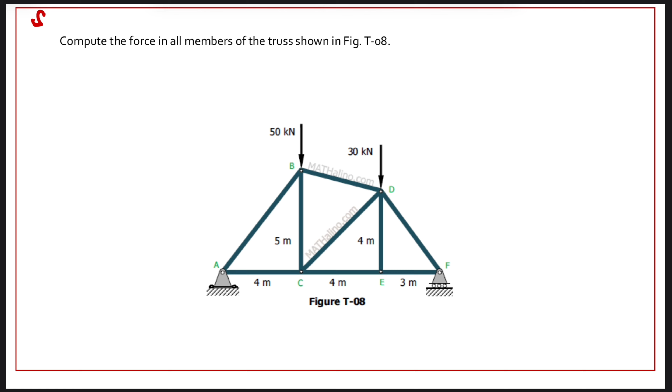Okay, so another example. This is sample problem number 2. Yung mahirap lang dito is nakakapagod siyang gawin, pero yung process niya is mabilis lang. So kaya kaya natin to.

So we have a force in all members of the truss as shown in the figure. Meron tayong roller tsaka pin, tapos 50, tapos 30 point load. Meron din tayong 5 meters na height, 4 meters.

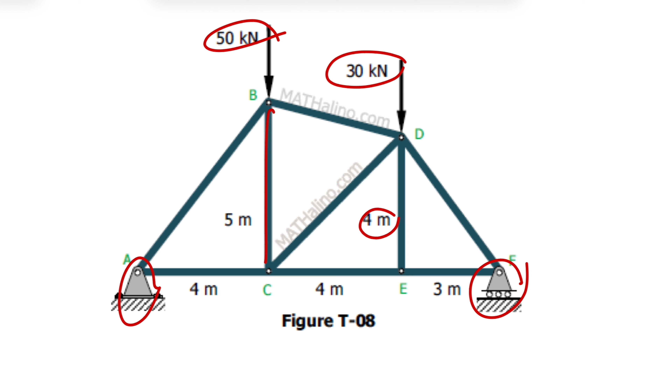Syempre, pwede na natin kunin yung mga hypotenuse nito. So, this one is magiging 4 plus 5, ito 3. Square root of 4 squared plus 5 squared. Hindi, 41 pala. This one is 41, square root.

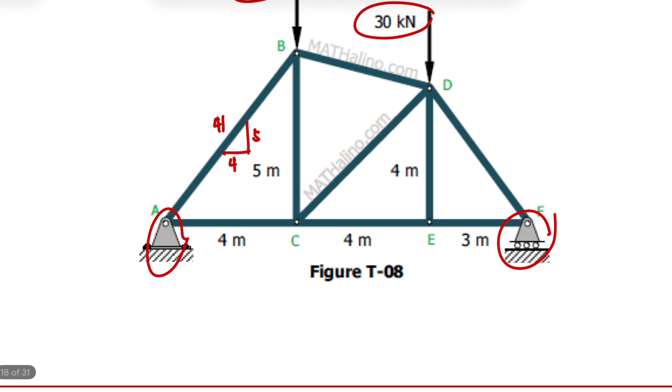Tapos, ito naman 3, ito naman yung 5. Ito, 4 and 4, 4 square root of 2. Tapos ito naman, ito kasi 4, ito naman 5 minus 4, so this is 1. So kaya 4, 1, meron tayong square root of 17.

Wala lang, nilagay ko lang kasi kailangan natin yan later.

So, this one is the roller tsaka pin. Yung reactions natin dito is pwede natin ma-solve AY. Solve natin yung reaction, summation moment at A. Meron tayong Fy, yung moment arm natin is 3 plus 4 plus 4, so magiging po itong 11.

And then, meron tayong downward or clockwise na 50, tapos 4, and then 30 minus 30 times 8, equivalent to 0. So, yung Fy natin is meron tayong 50 times 4 plus 30 times 8 divided by 11, equals 40.

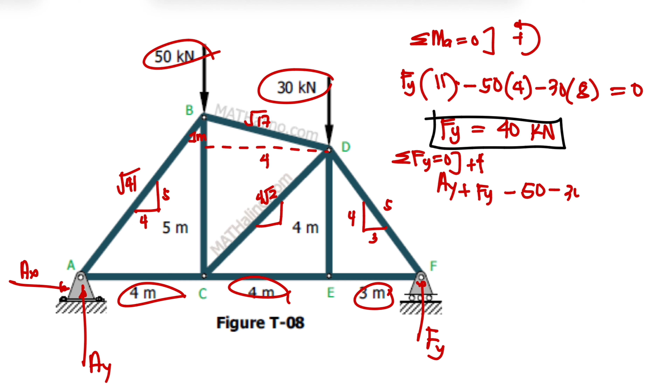So sa AY, summation forces Y, meron tayong Fy minus 50 minus 30. Yung Fy natin is 40, ibig sabihin yung AY natin is 40 din.

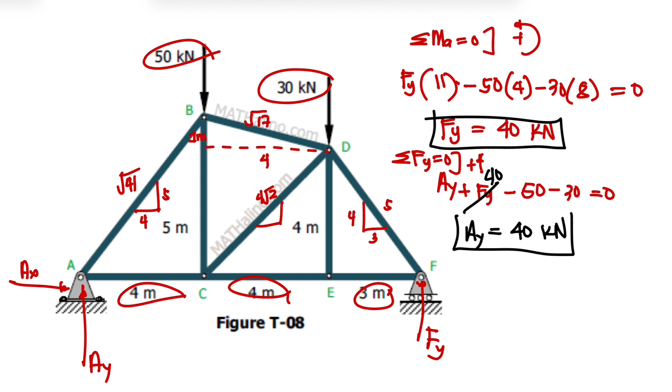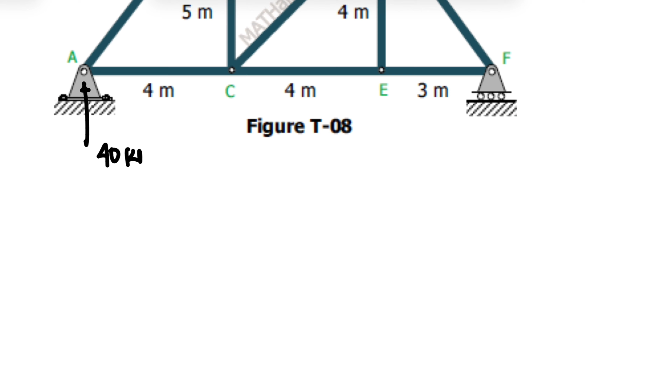Yung AX is equivalent to 0, hindi natin siya include. Okay, solve natin, meron tayong 40, parehas upward, no? And 40.

Para na tayong step number 1. Step number 2 is to choose a joint na meron dalawang unknowns. Siyempre, pili tayo dito sa dalawang support. Kahit alin dyan yung kunin nyo, makakasolve kayo ng dalawang unknowns. Unahin natin itong A.

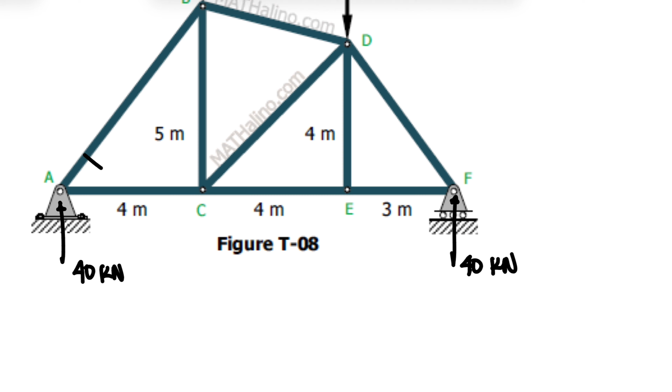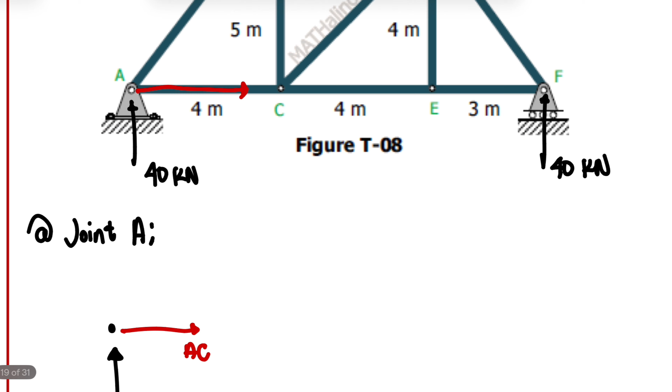At joint A, draw the joint A. Meron tayong 40. Tapos, unknown natin is itong AC, in tension.

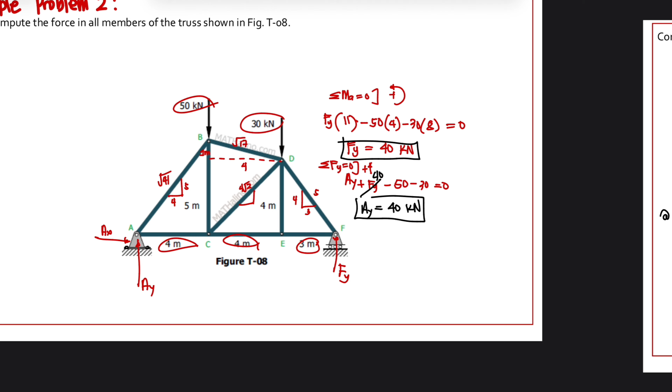Tapos, yan, AB diagonal. I-drawing natin yung triangle: 5, 4, tsaka square root of 41. 4, 5, square root of 41. So, in this way, malalagay natin yung ABY and ABX. AB, 5 over square root of 41. Wherein yung ABX is AB, 4 over square root of 41.

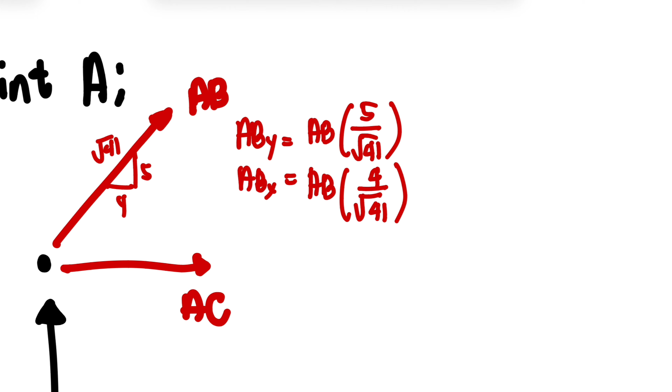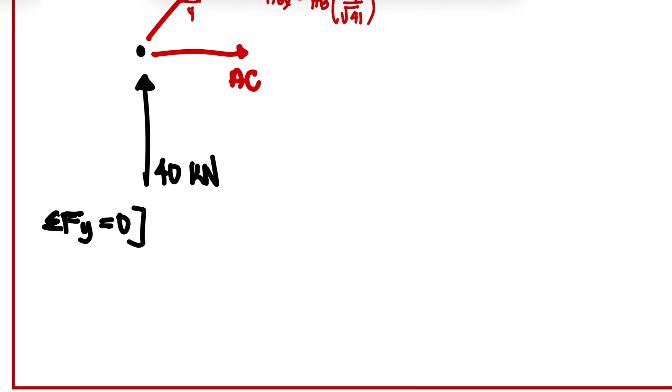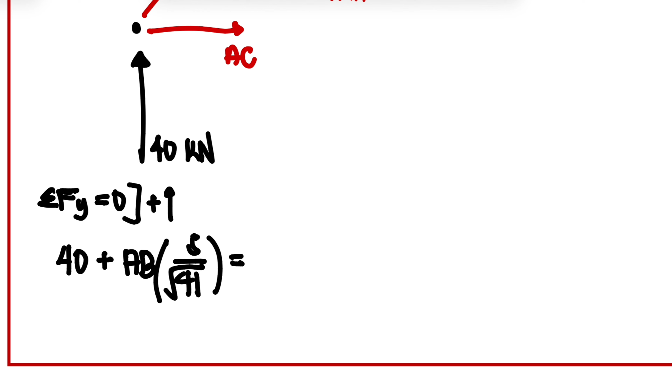So, summation forces Y. Kapag ganito, meron tayong 40, tsaka AB. So, kaya ang mangyayari, 40 kasi is upward, plus ABY, wherein yung ABY is 5 over square root of 41. This is equivalent to 0. Kung ma-observe natin yung AB natin is magiging negative.

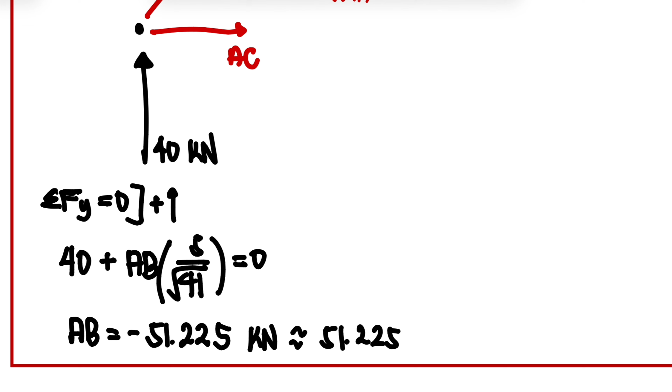51.225, or this is 51.225 kilonewton, compression, C.

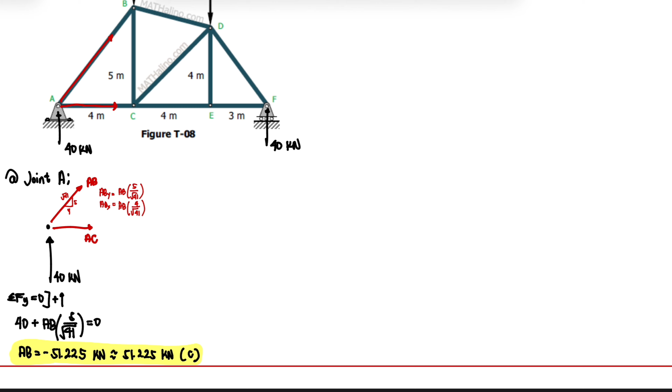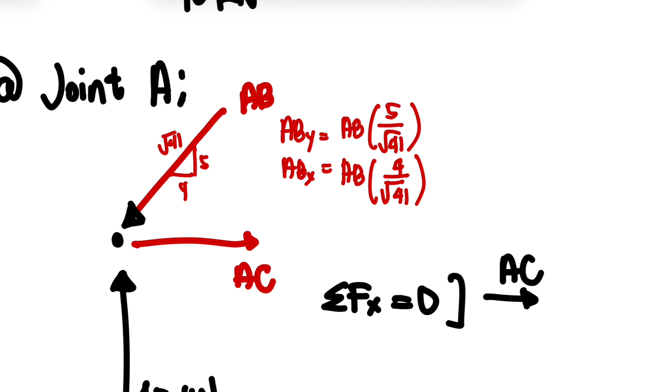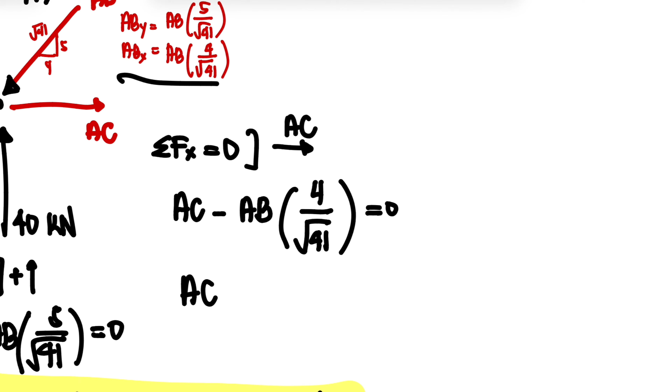Meron tayong 32. This is in tension.

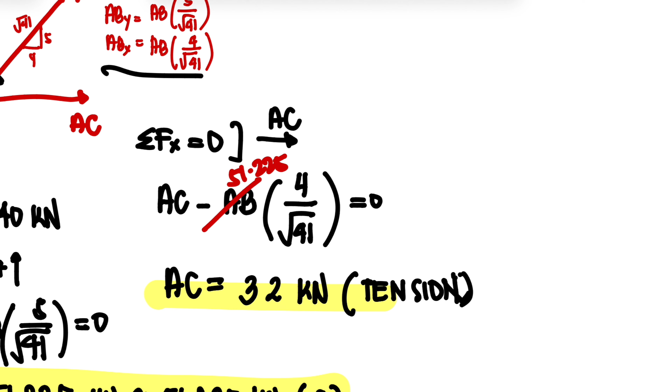Okay, so next joint, ano tayo? Pwede tayo mag-joint A, pwede naman tayo mag-joint C. Ay, joint B o kaya joint C. Kapag joint C, 1, 2, 3 - tatlo. Kapag naman joint B, 1, 2. So, joint B tayo.

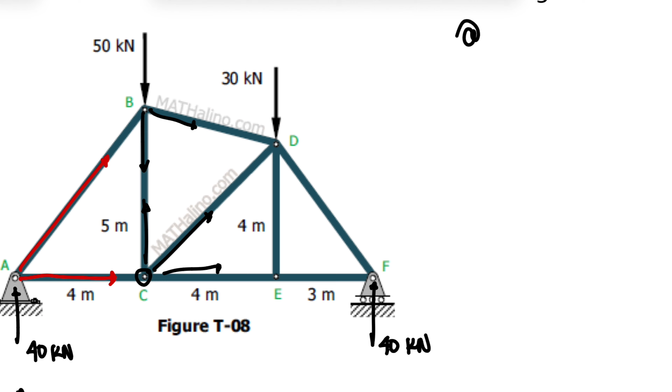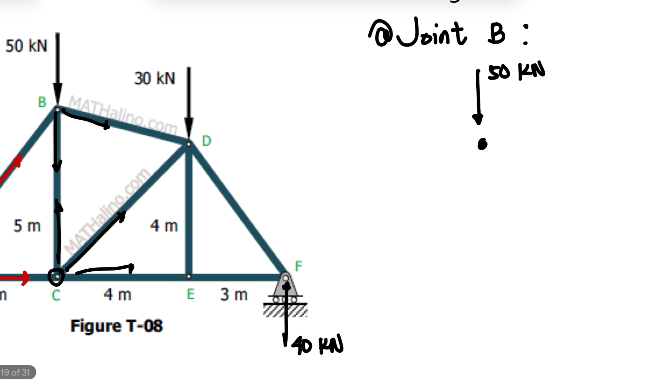So, joint B, meron tayong downward na 50. Yung AB natin is in compression, kaya papunta po siya doon sa point.

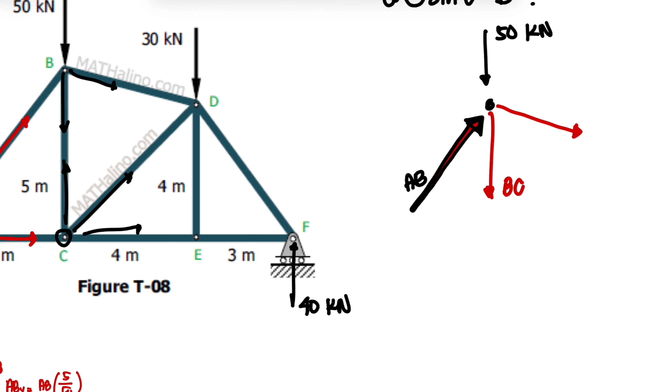Next, BC. Tapos, slant naman ulit, BD. Masyadong marami ng slant, pero drawing natin dito sa BD. Meron tayong BDX and then BDY.

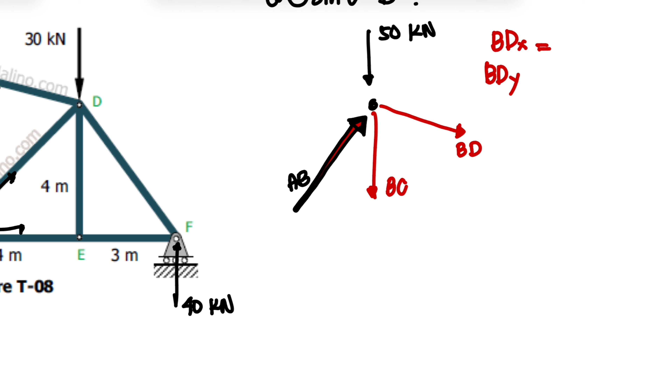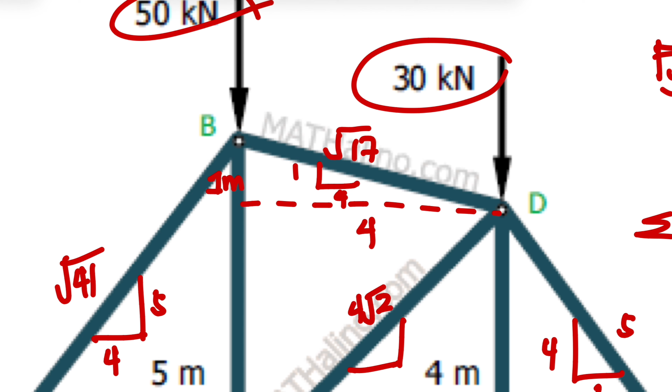Kapag BDX, meron tayong ito: 4, tsaka 1, 17, square root of 17. Yung x, 4 over square root of 17. Bali, yung BDY naman is 1 over square root of 17.

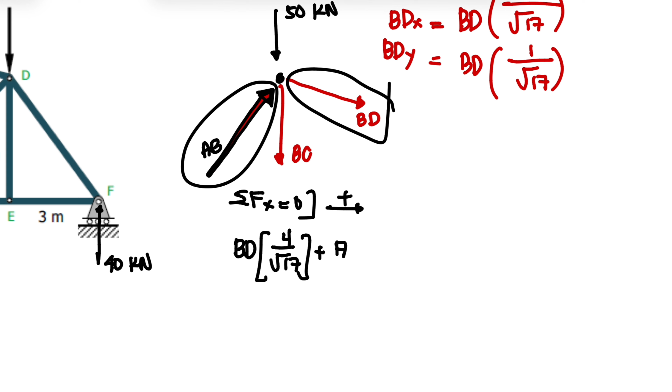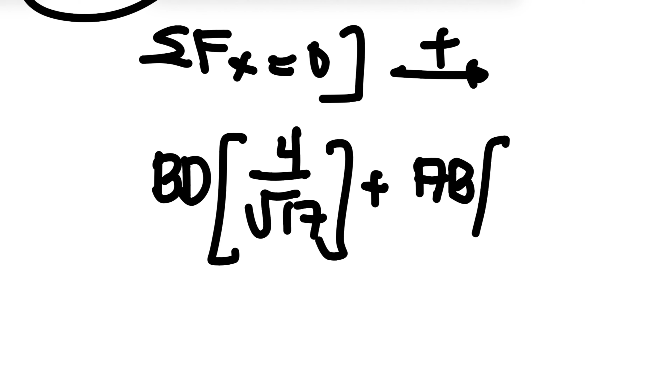So, again, solve natin summation forces horizontal, x equivalent to 0, to the right positive. So, yung horizontal lang natin is itong AB, tsaka BD. Kaya, magiging siyang BD, X, 4 over square root of 17, plus AB. Pero yung AB, meron din yung diagonal, no? Kasi ito yan, no? AB, X, 4 over square root of 41. This is equivalent to 0.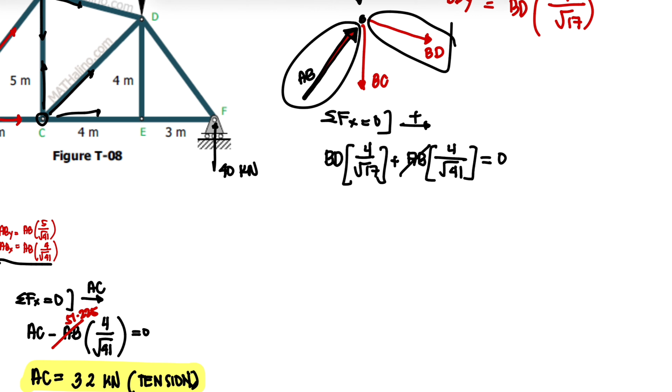Pero meron na tayong value ng AB na equivalent siya sa 52... ilalagay ko na dito, no? 51.225.

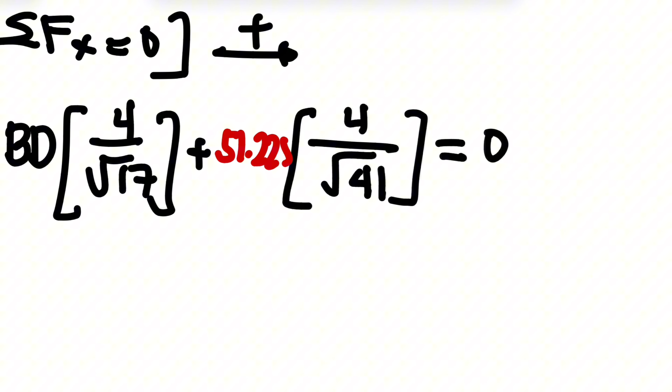So, using this equation, makasolve tayo ng BD, that is equivalent to square root of 41 times square root of 17 divided by... 32.985 kilonewton.

So, this is square root of 17 divided by 4. This is negative, so this is compression. Alisin ko na lang yung negative, no? Okay, kailangan panoorin nyo itong video.

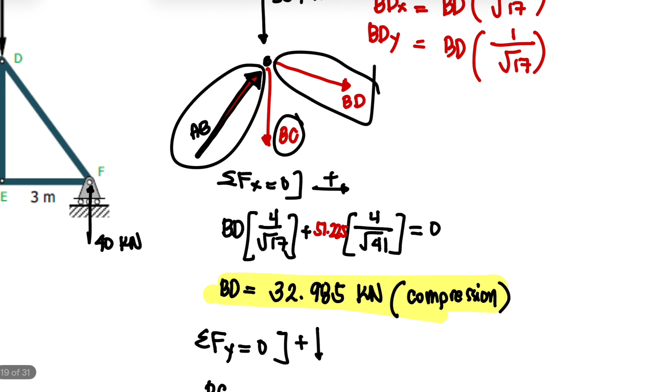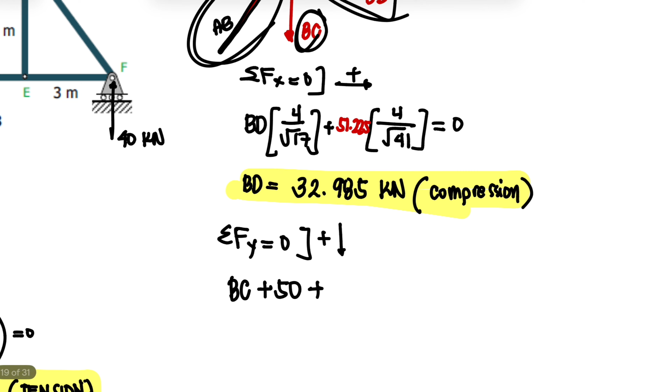Tapos, summation forces Y naman tayo. Yung Y natin is, meron tayong BC na downward, lagyan na lang natin as downward din. So, meron tayong BC downward, bali magiging 4 yung ilalagay natin: AB, BD, BC, 50. Yung 50 is downward din, so positive. Yung BD is downward din.

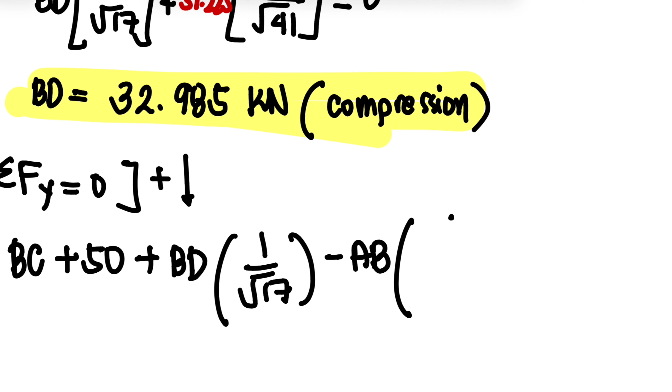So, BD pero y, kaya 1 over square root of 17. Yung AB naman is minus 5 over square root of 41, equivalent to 0. So, from this, meron na tong mga value.

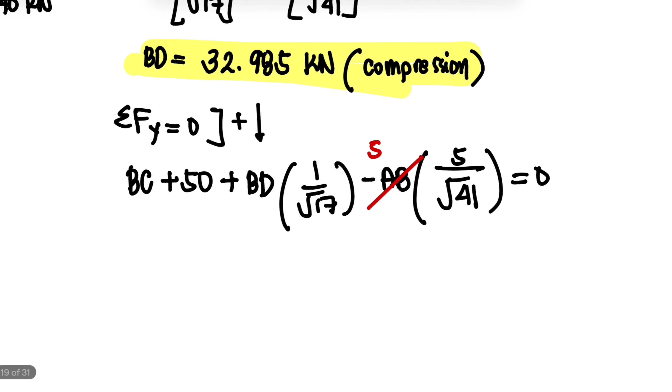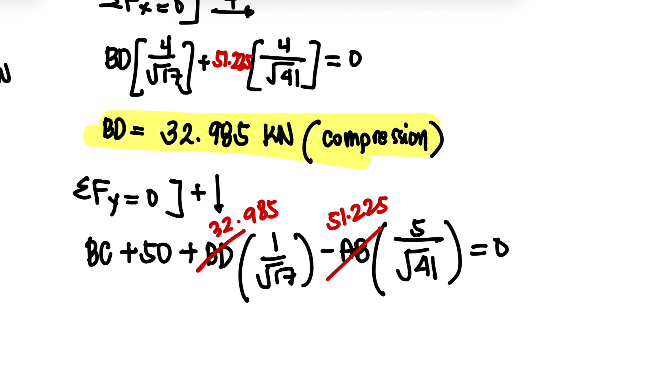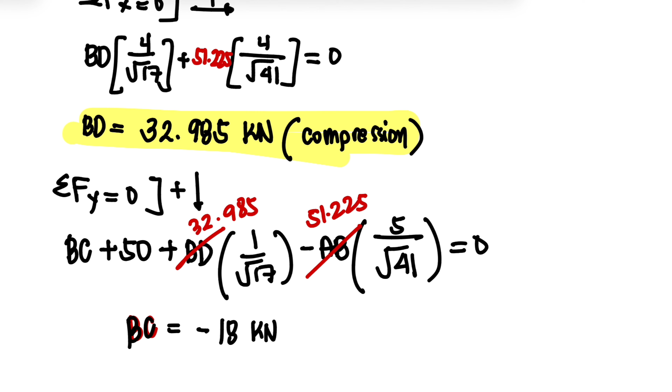51.225, wherein yung BD naman is 32.985. Kaya, ang mangyayari, we have 5 over square root of 41 minus 32.985 times 1 over square root of 17, minus 50. Yung BC is magiging negative 18 kilonewton. Since this is negative, i-rewrite na lang natin siya, kasi this one is in compression, BC.

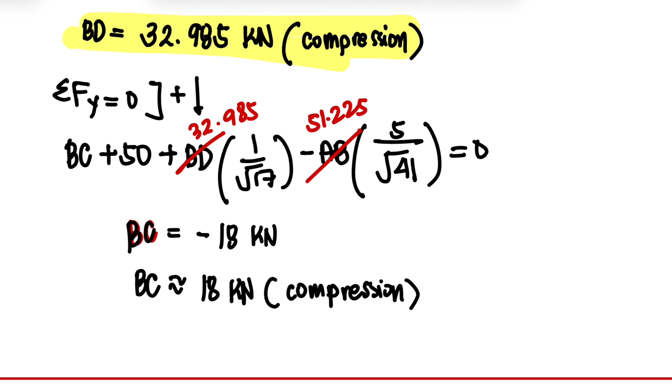Okay, now we can continue solving for the force. So, we can proceed with joint C.

Since we have the value of BC, our unknowns are CD and CE, since we also have AC already. Let's circle that. So, at joint C, let's draw the joint.

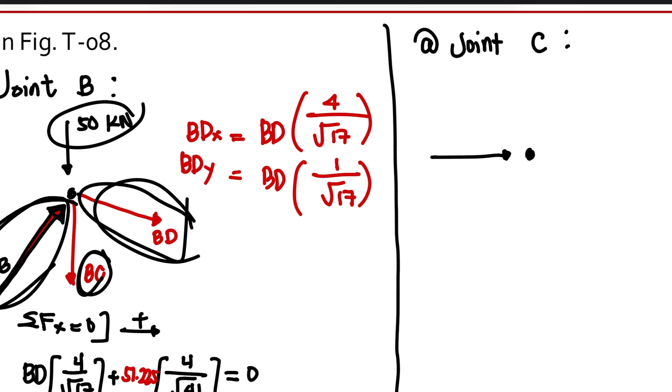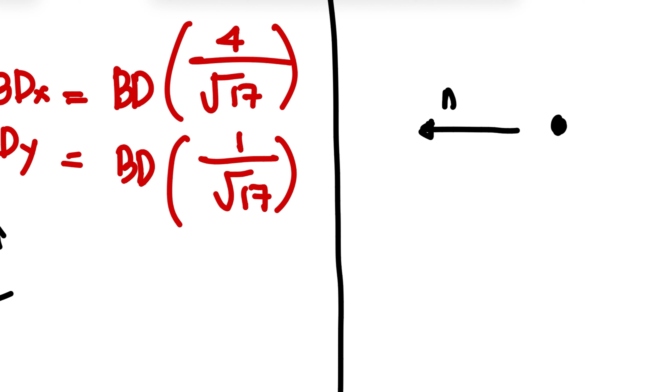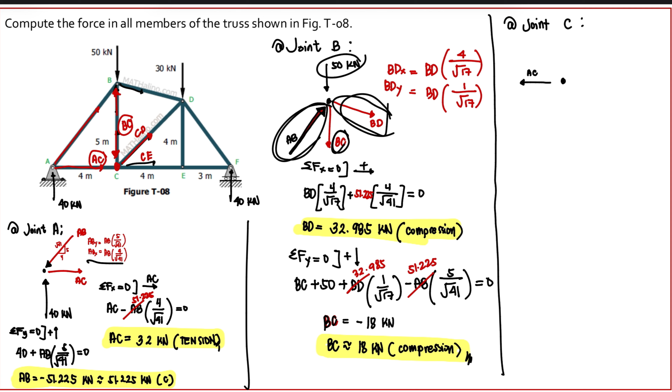This is joint C. We have AC, wherein our AC that we solved is in tension. Aside from AC, we also have upward. Our BC is in compression, so this changes. In joint B it's like this, but when we look at joint C, it goes inward. I hope that's understood.

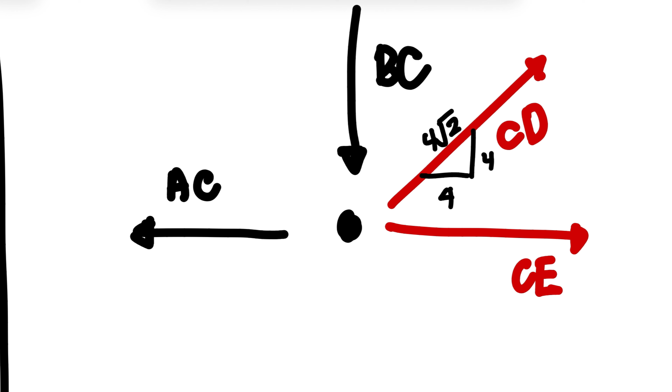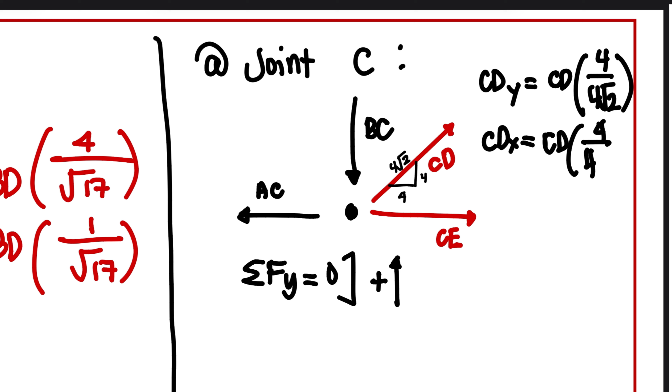With this, we can solve first for CD since we only have one BC. So, summation of forces Y equivalent to 0, upward positive. CD has CDX and CDY components. CDY is CD times 4 over 4 square root of 2, and CDX is CD times 4 over 4 square root of 2. So for summation of forces Y: CD times 4 over 4 square root of 2 minus BC equivalent to 0.

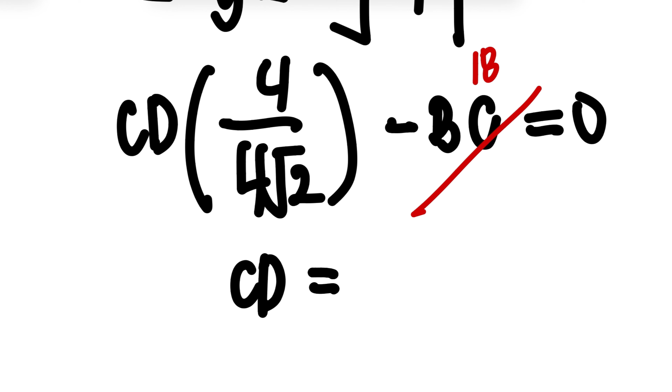25.456 kilonewton. This is positive, so it's tension.

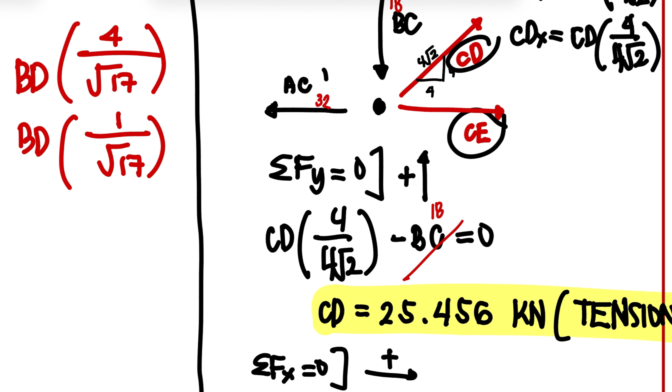Then, using summation of forces X equivalent to 0, to the right positive. We have CE to the right, CD to the right, and to the left is AC. Let's put CE plus CD X plus AC, which is minus since it's to the left, equivalent to 0. Let's expand this, we have CD.

CD already has a value we got, let's substitute: 25.456 times 4 over 4 square root of 2, minus 32, equivalent to 0. So 32 minus 25.456 times 4 over 4 square root of 2.

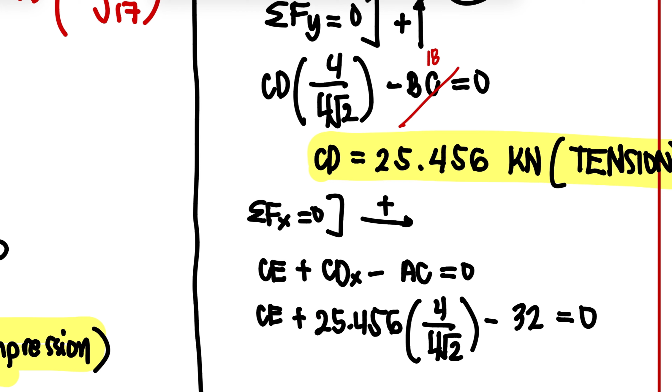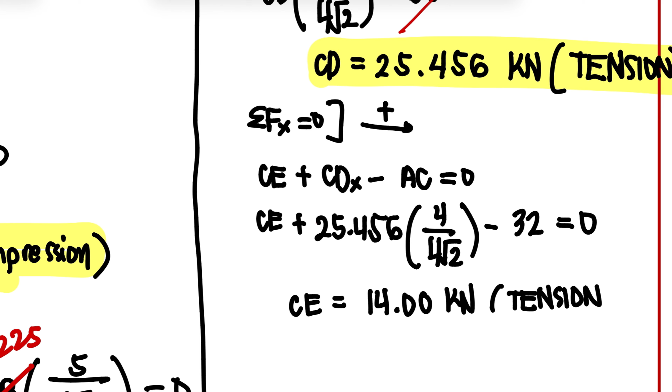CE is equivalent to 14 kilonewton. This is positive, so it's tension.

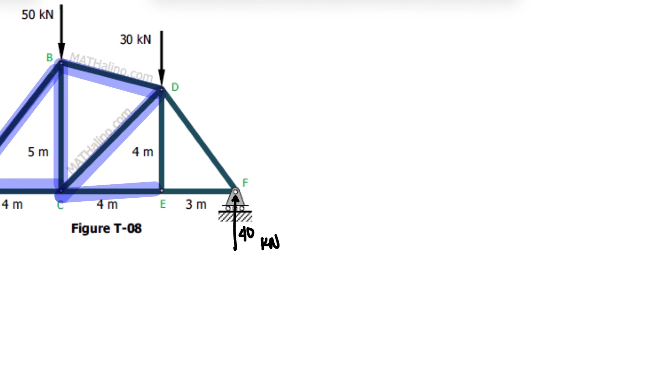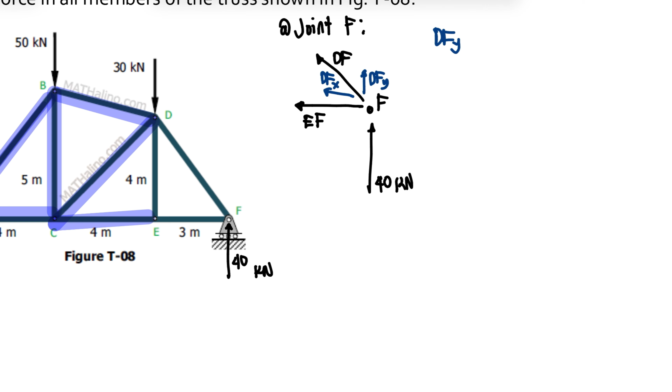We have upward reaction of 40. Then to the left, tension EF. Then diagonal DF. Our DF has two components, DFY and DFX. If this is 3 and this is 4 for the height, this is 5. So DFY is equivalent to DF times 4/5, wherein DFX is DF times 3/5.

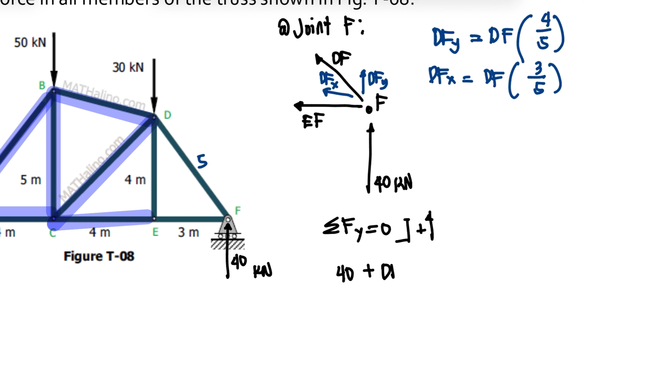So for summation of forces vertical equivalent to 0, upward positive: we have 40 plus DFY, wherein DFY is DF times 4/5, equivalent to 0.

So our DF is equivalent to negative 40 times 5 divided by 4, negative 50 kilonewton. Since negative came out, let's rewrite this as 50 but in compression.

This direction carries over to our next solution, so we change the direction of DF, replacing it with compression. So for summation of forces X: to the right positive, to the left negative. Our EF is negative, but our DF becomes positive because DF is now to the right.

But the components also change. It becomes like this: this is DFX, this is DFY. DFX is DF times 3/5, equivalent to 0.

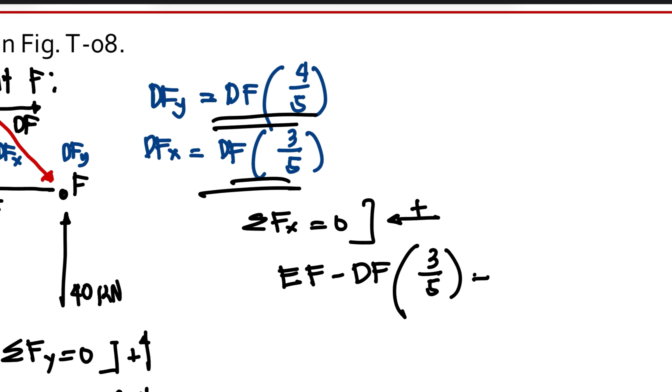Our DF, which we just solved, is equivalent to 50. So our EF is equivalent to 50 times 3 divided by 5, giving us 30 kilonewton, which is in tension since it's positive.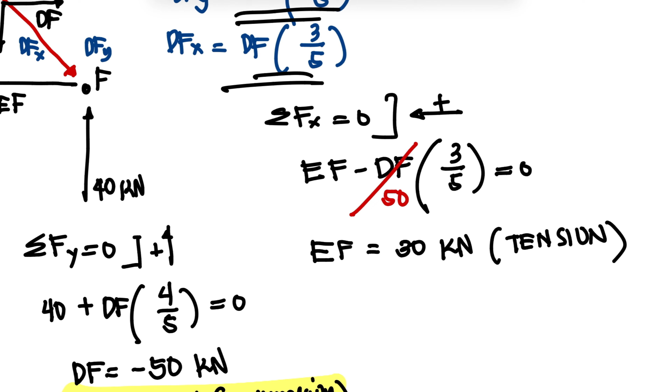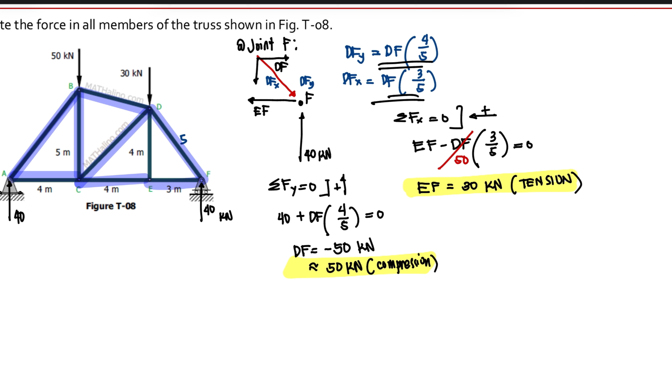Lastly, having solved EF and DF, we only have one left, which is DE. We can solve this using point D, or for simplicity, point E. So at joint E...

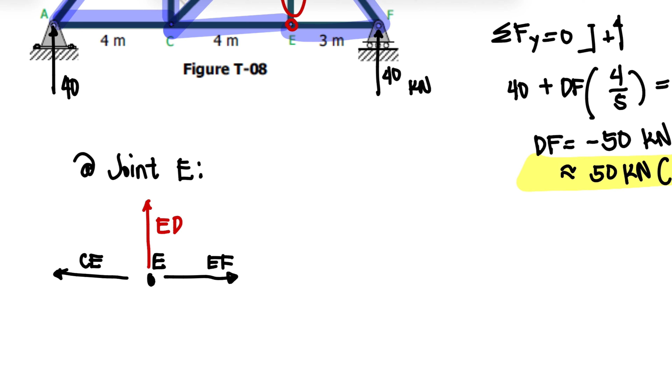But what do we observe? For summation of forces Y, upward positive, our ED has no other force that's upward or downward, so this is equivalent to 0 kilonewton.

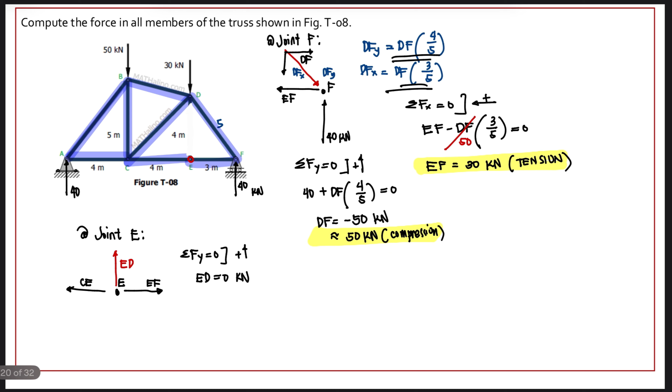So, this is the final answer for problem number 2.